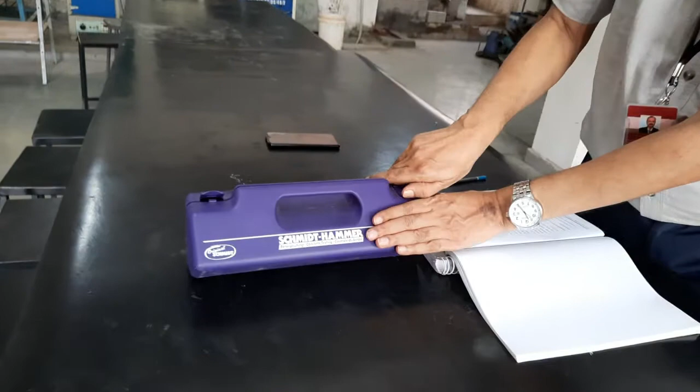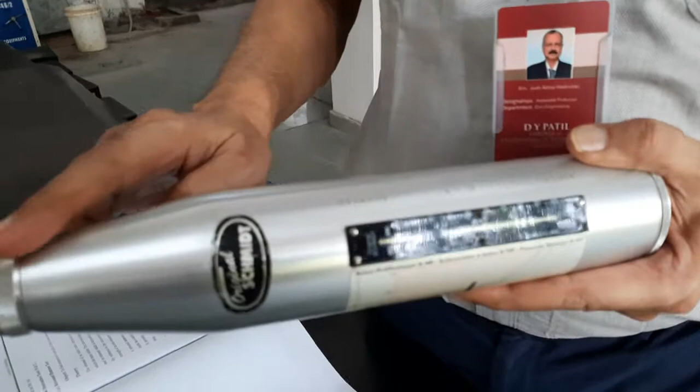I will just show you, you can see this is the rebound hammer, right? This is the main body, or it is called the casing. Inside this there is a spring loaded mass which can come out. If I press this, it will come out, and again I will press it on the column or concrete member. You can see there is a scale, measuring from 10, 20, 30, 40, see the least count, and on that you have to measure this rebound hammer. At present whatever is showing, it is almost about 30.

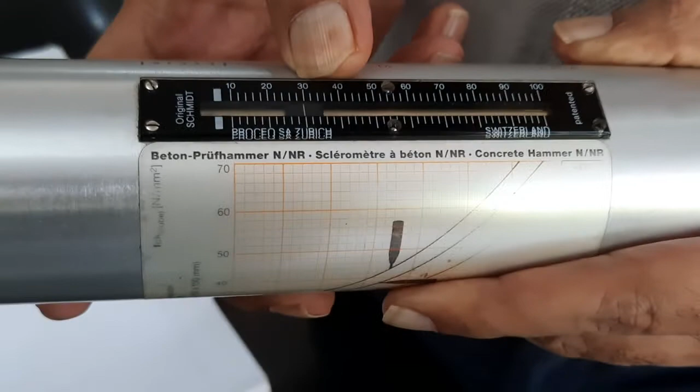So the rebound value is 30. How to interpret that is another part. Similarly, you can see there is a graph here. What is written here? This is the rebound value, and here it is the compressive strength equivalent to a 150 by 150 by 150 mm cube. So indirectly we are calculating compressive strength. You can see three graphs, 1, 2, 3.

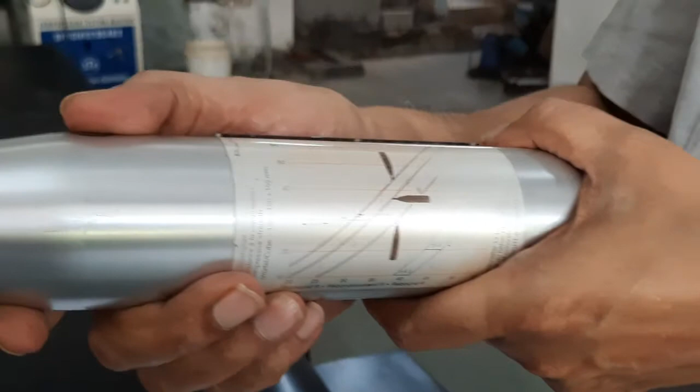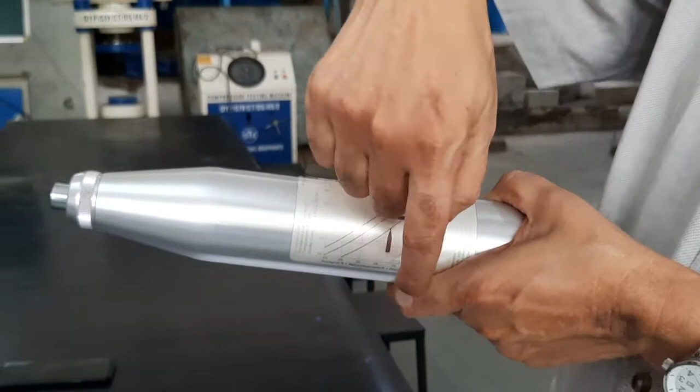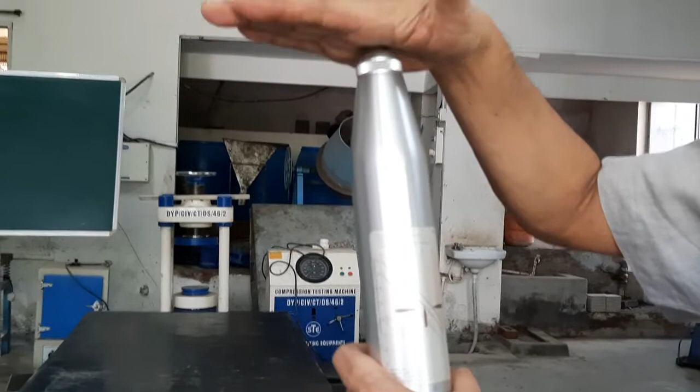It depends on how you are holding the rebound hammer. Now I am holding it perpendicular to the surface. This is a concrete surface, so I have to use this middle graph, and the corresponding rebound value and strength I am going to calculate. If I am going to put it like this, that means vertically, suppose I am supposed to take a reading or quality checking of a slab or beam bottom, so it will be like this. In that case, this figure you have to use, because this is vertically upwards, or suppose vertically downward.

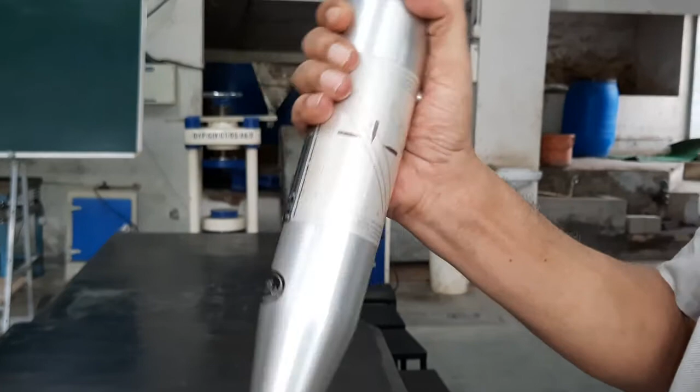The member is here and I am taking the reading vertically downward. So again you can see there is a third graph, which is for vertically downward. So depending on how you are holding it, you have to select either this graph or this or this, but we are going to measure horizontal surface quality. So let us go to one column.

You carefully observe what I am doing. Now this is the concrete column we are going to measure. Actually, the basic rule is that this is a plastered surface, so this is to be broken, and whatever exposed concrete or bare concrete surface, that is to be made open, and that is to be rubbed by this emery stone. This is emery stone, and this concrete surface is to be smoothened. This is for smoothing. So wherever you are going to take it, it will be smoothened.

Now one thing is there, that is you cannot take only at one point, because suppose I am testing it here, and right inside it there is a stirrup, so it will definitely give high value. Or immediately below that there is a strong big coarse aggregate piece, it will give high value. Suppose I am testing here, then there may be some void and it will show very less value. So this is not acceptable.

So in order to reduce these chances of error, it is recommended that on this entire column you have to take 12 readings. How many? 12 readings, and you have to take the average of those 12 and find out the average rebound value, and then correspondingly with the graph and all these things we are going to calculate.

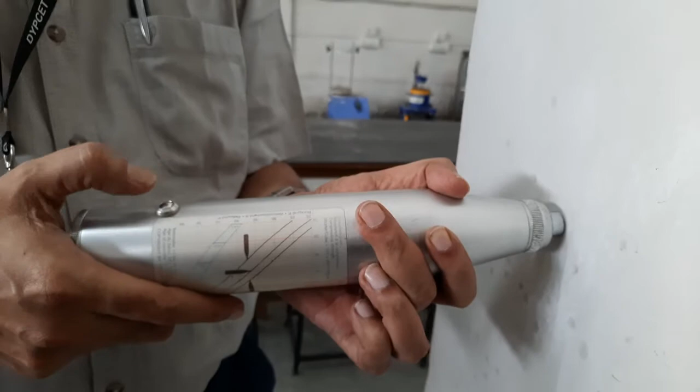Now here there is a release pin, you can see, and how I am operating. This is very important. Okay, what I am doing now, I am not taking any reading, just I am showing how to unlock and lock. Now I am unlocking this by pressing. This is unlocked. Right, now I will press this. There will be a rebound of that mass on this hard surface. It will bounce back, and then I will lock it.

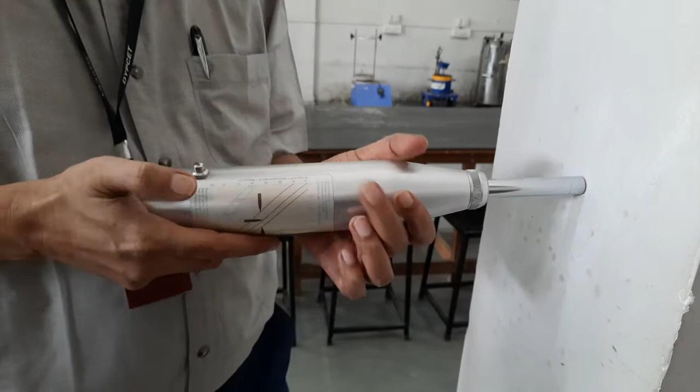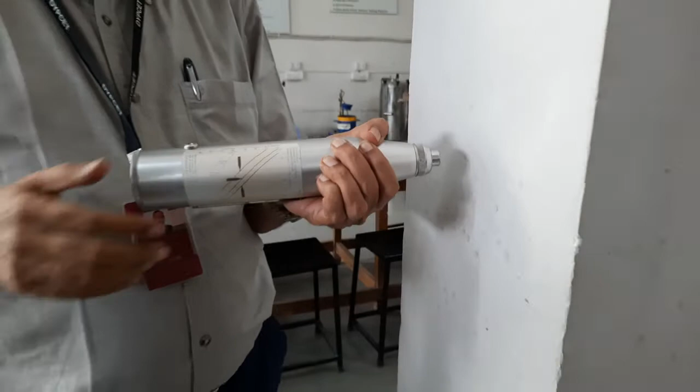Right now I am not going to take any reading. I will just show how the locking is to be done. You have to learn this. Okay, I am pressing this, holding, pressing this and pulling back. It is locked. So this is the way to take a reading. So likewise we will take 12 readings. Okay, so now we will start taking readings.

Now this is our column, and on this column we have to take an average of 12 readings. So I will take 4 on this face, 4 on this, and 4 on this, so 4 each, and at various places, bottom, here, here, so that if any stirrup is there, it will be more reading, and where a void is there, it will be less. And remember, it is not to be taken near the cover. Suppose it is 25 mm cover, in the cover portion you are not supposed to take any reading, because it is weak.

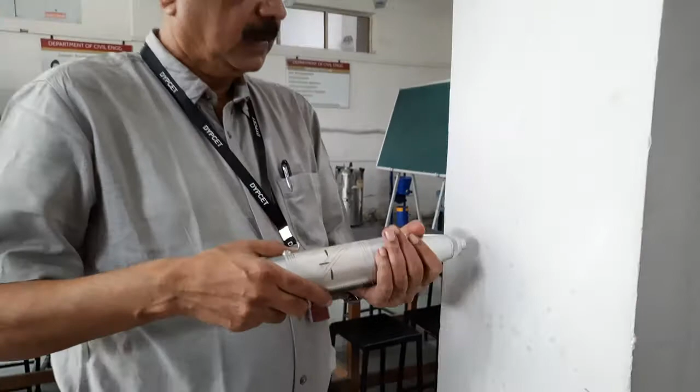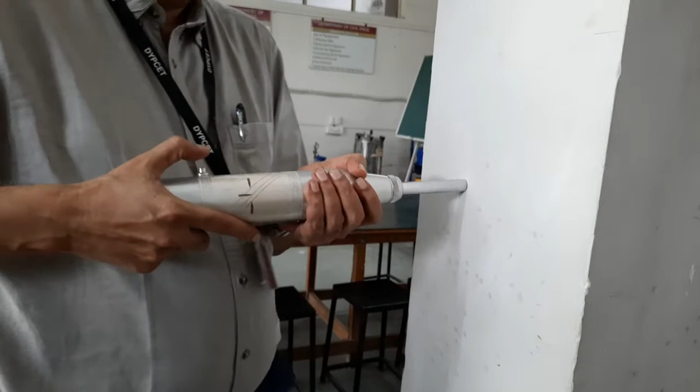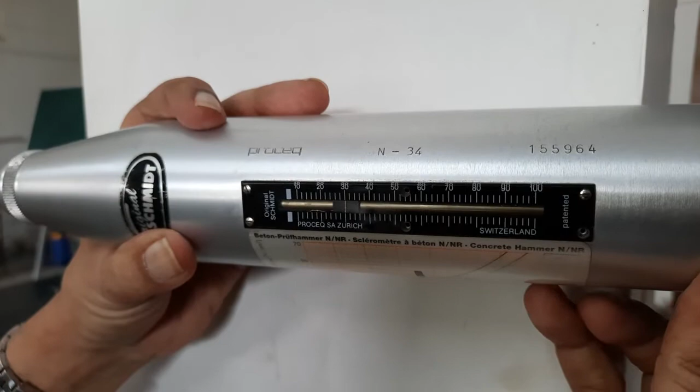Okay, now can you see what I am doing? I am taking the first reading. You have to observe this here. Now what I am doing, just look. So this is my first reading. I am unlocking it, locked, and now I have to take this rebound value, exactly 30. It is exactly 30. So 30 will be written in the table against 1. First position rebound value is 30.

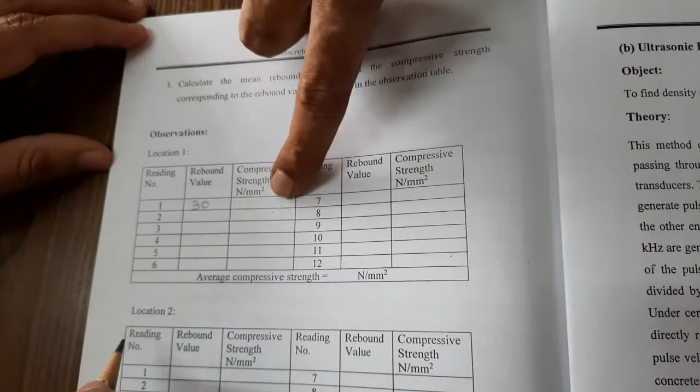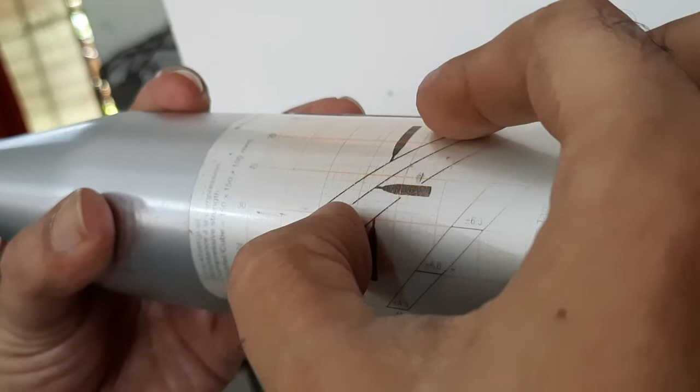Now what is its corresponding compressive strength? Now we have to see the middle graph, and here I will show you the middle graph. This is the 30 value. Can you see this 30? And here is the compressive strength of a 150 by 150 by 150 mm cube. So I will go through this 30 to where the graph ends here. So it is giving 28 Newton per mm square compressive strength. So it will be entered in the column: 28 Newton per mm square.

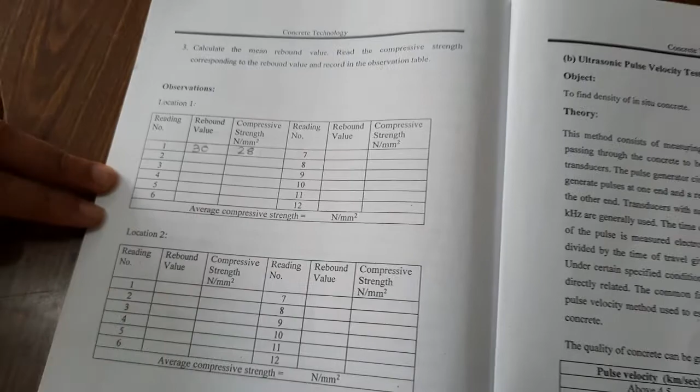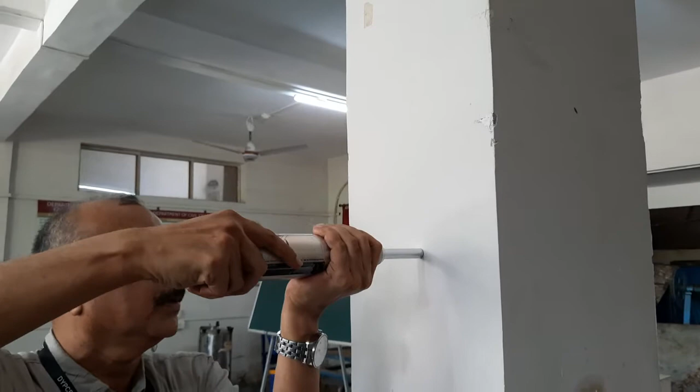So likewise, you have to take all the readings. So the second reading I will take somewhere here, at another place. I am taking the second reading. Okay. Now, what is the reading here? You can see 20 and 30, least count is 2. So it is 28. Can you see? Rebound value is 28. So it will be written 28.

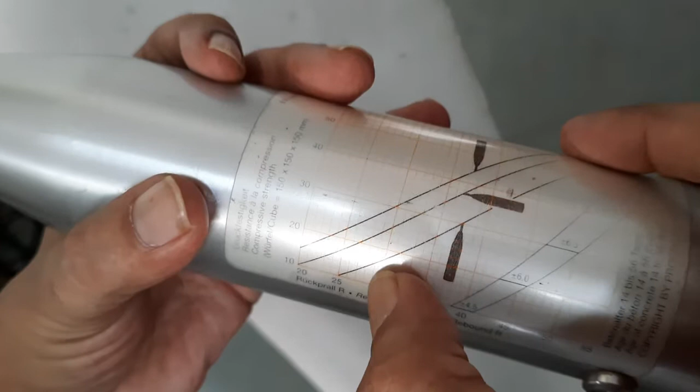Now, what is the compressive strength related to that? I have to go through this again. So 30, and this one more line is there, that is 28. So 25, 26, 27, 28, right? So I am going to take this line, and here it is giving compressive strength 25 Newton per mm square. So see, there is a variation, 25.

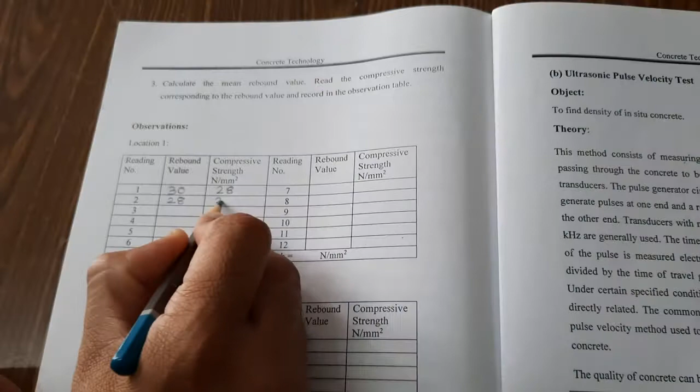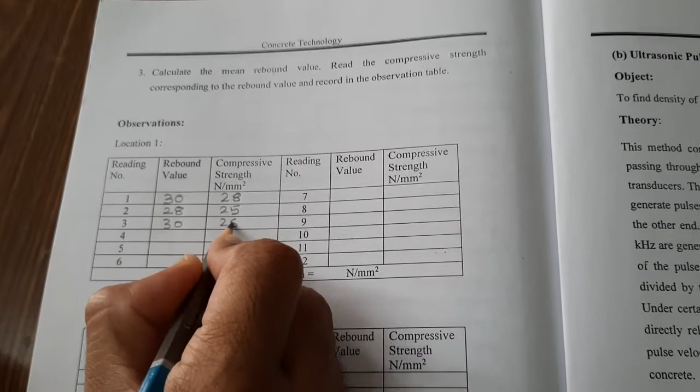Now I will take here at the bottom. Again the value is in between 29 to 30, so we can take 30. Okay, so it is 30. So again, for 30 we have already mentioned that it is 28 Newton per mm square. Okay, another place I can take, I should take at the top. Okay, at the top I am taking.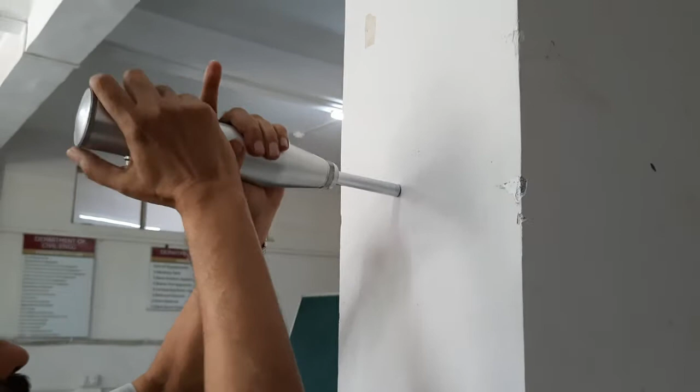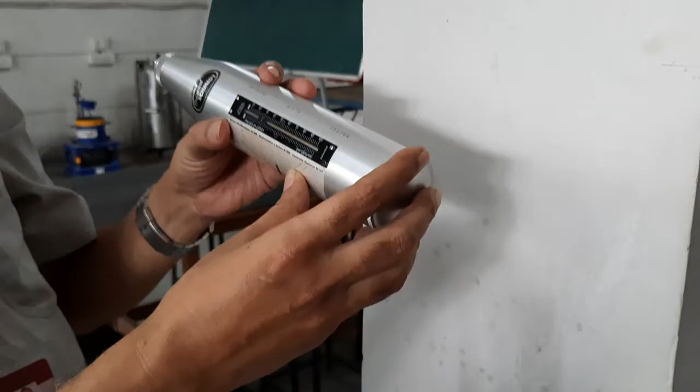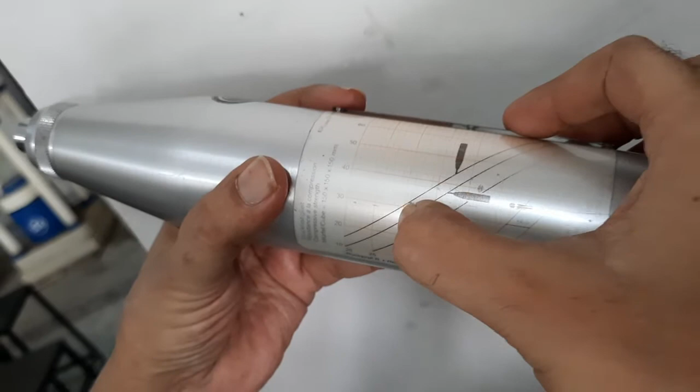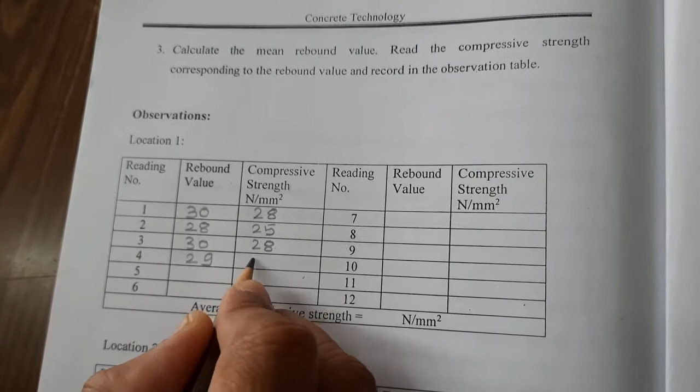No, something is wrong here. Now here you can see at the top position it is again 29. So corresponding to 29, I will also take here 29. Here it is almost 29. It is 29 Newton per mm square. Value is 29 and strength is also 29. So 4 readings are over on this surface. So another 4 readings I am going to take on this surface. Okay.

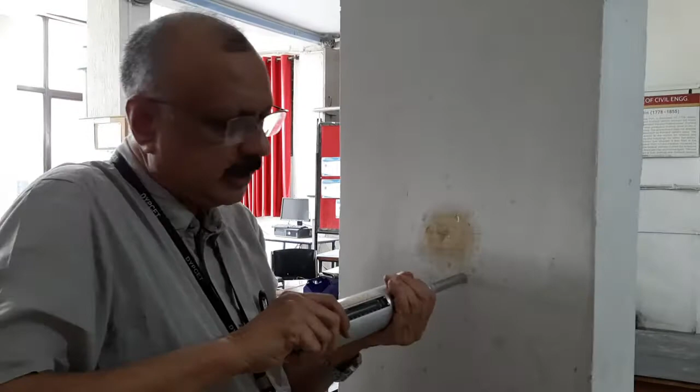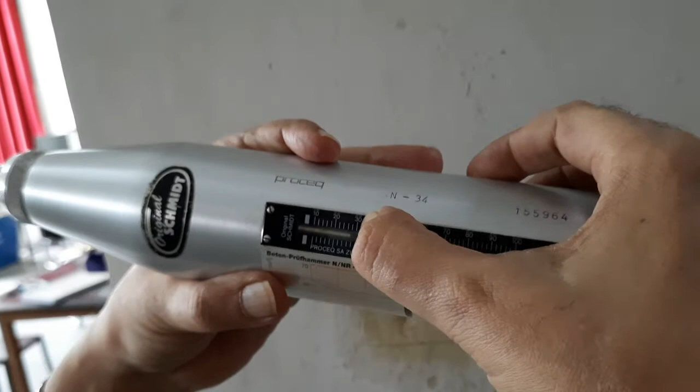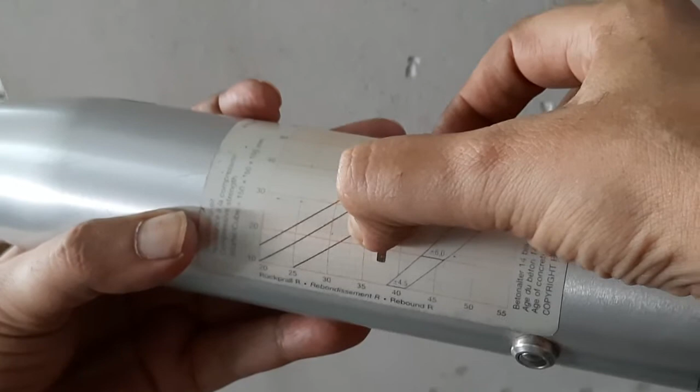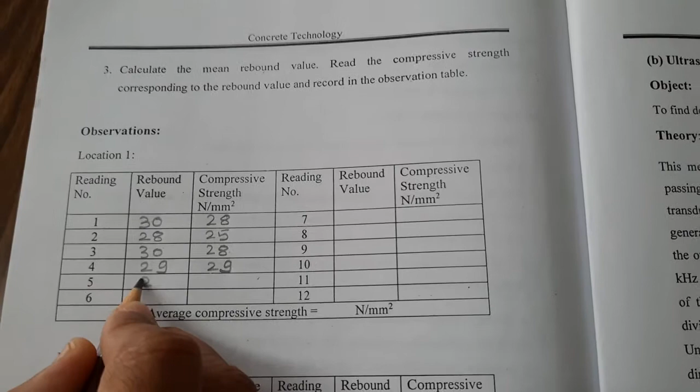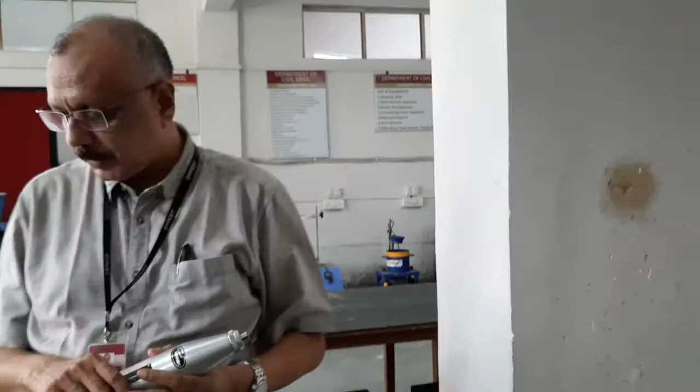Likewise, with this hammer, we are going to cover all the faces, top to bottom. So in total, how many have we taken now? 5 readings we have taken. So likewise, we will be taking 12 readings and then we will calculate the average. So the rest of the readings I will be taking now. Another face. Okay. So one reading I will take here.

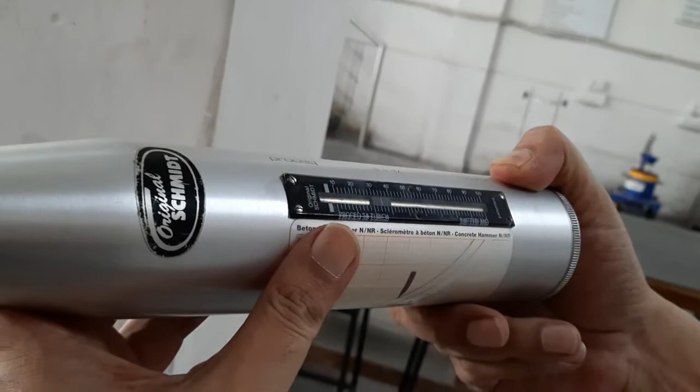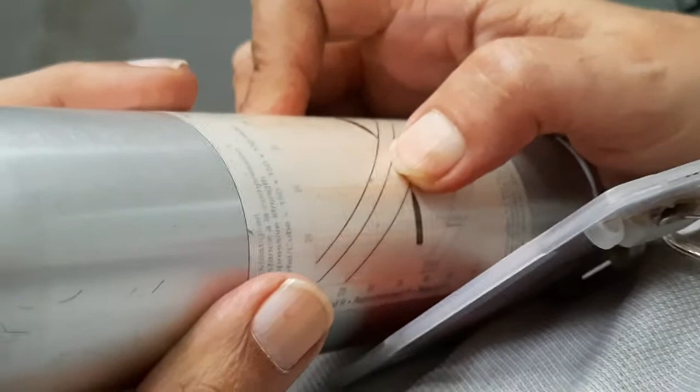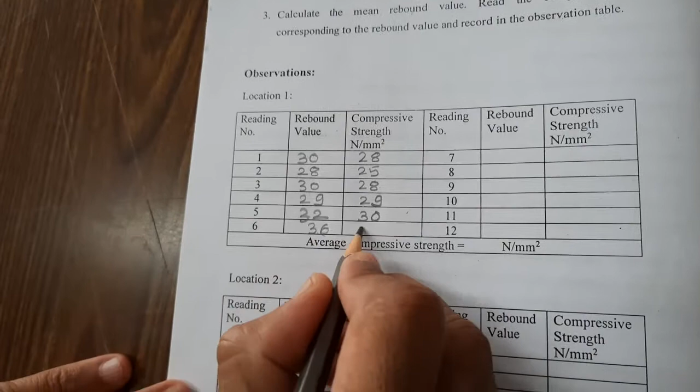So what is the reading here? 32, 34, 36. So it is 36, and corresponding to 36, I can see here, this is 35 and this is 36. So I will go up to the middle graph and it is 32. So value is 36 and strength is 32.

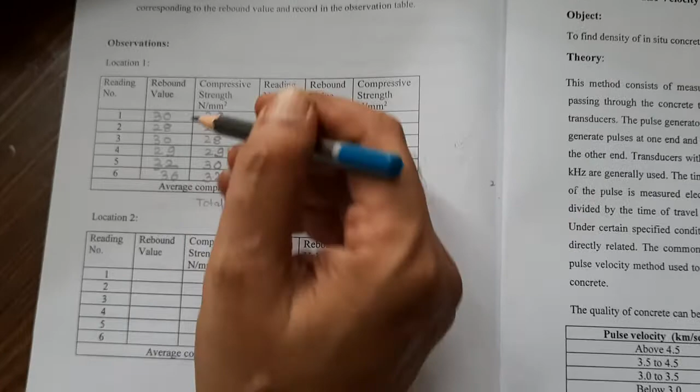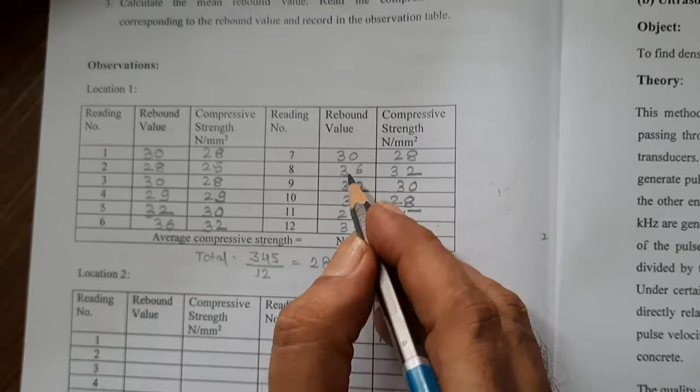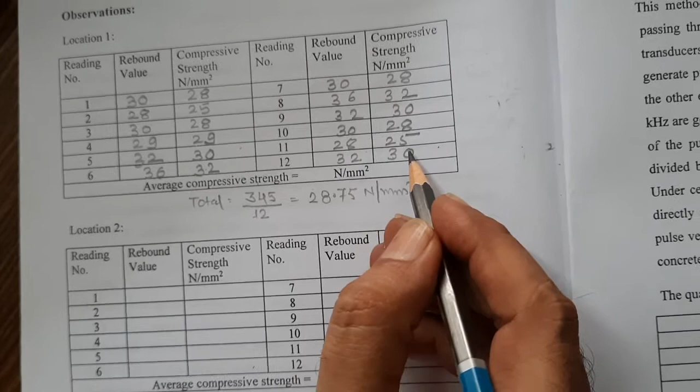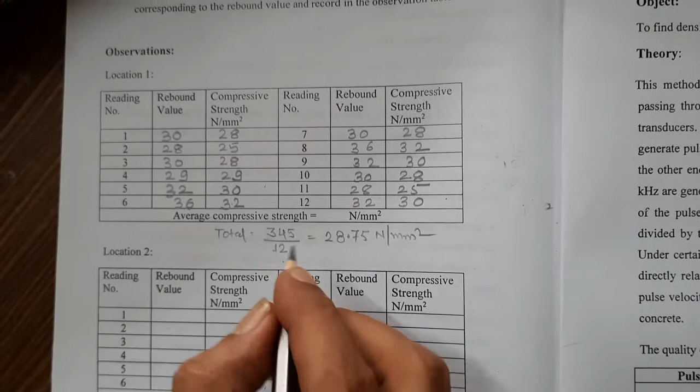Earlier we had taken 5 readings, and now the remaining readings up to 12 I have taken and entered here. You can see the 6th reading value was 36, corresponding compressive strength was 32. Similarly the 7th reading was 30, 28, the 10th reading was 30, 28, and the 12th reading was 32 rebound value and 30 Newton per mm square compressive strength. Now what are we supposed to do? We have to take the average of these 12 strengths. 345 is the total, divided by 12.

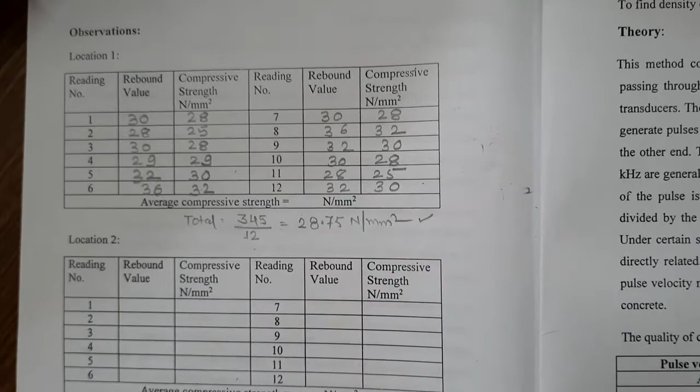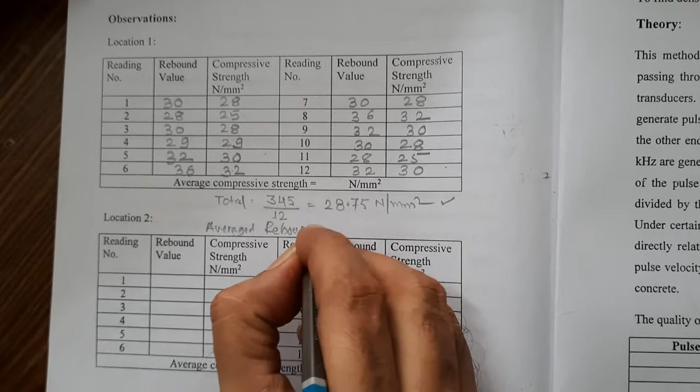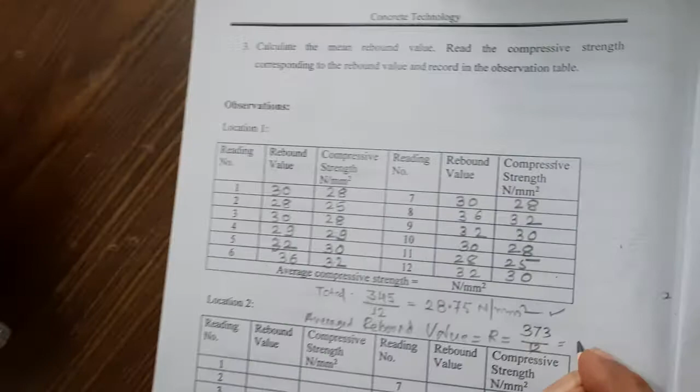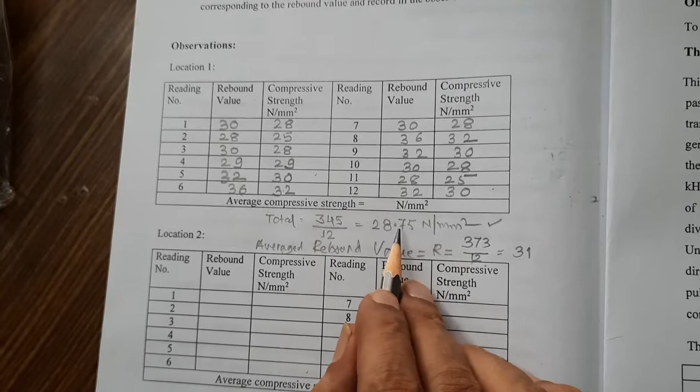So the average compressive strength is 28.75, and the average rebound value we will also calculate. Average rebound value is denoted by R. That will be the sum of these 12 divided by 12. So the total of these 12 rebound values is 373, divided by 12, giving me rebound value 31. Okay, so rebound value is 31 and average compressive strength is 28.75 Newton per mm square.

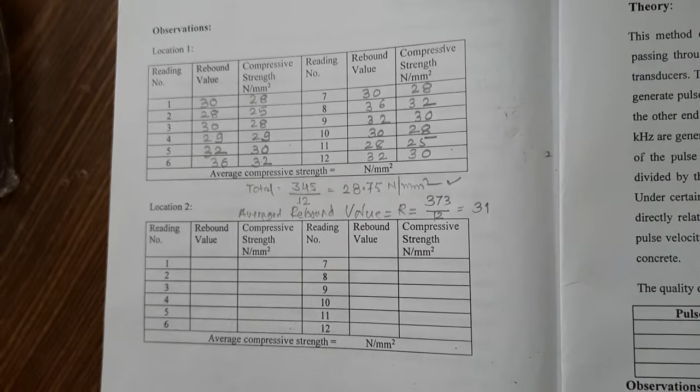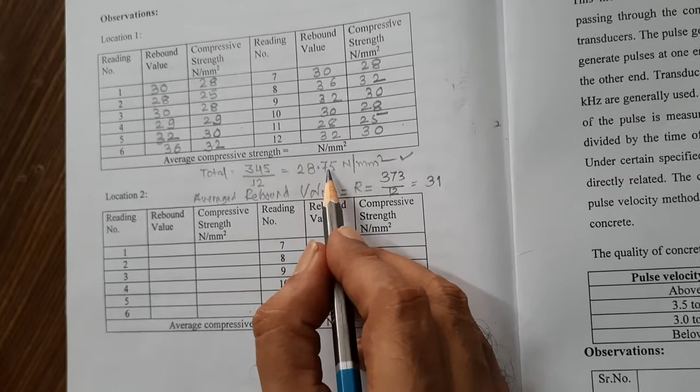So this concrete is acceptable, because at that time, for RCC they were using M15 concrete. That means minimum 15 Newton per mm square. Now this column is about 40 years old, and still it is giving 28.75. So it is near M30 concrete, in between M25 and M30 concrete.

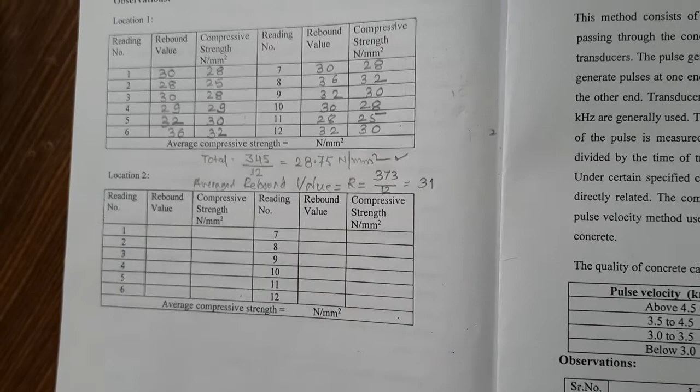So without disturbing the column, we haven't broken it, we have not done any destruction. Can you see any destruction, any crack, anything? So without destruction we have tested it, and that's why it is non-destructive testing. Without breaking it or chiseling it, I have taken readings, and I can surely comment that this column is in excellent condition. So that will be my conclusion. Likewise, we have to give the report to the audit. Okay, so this is all about this.